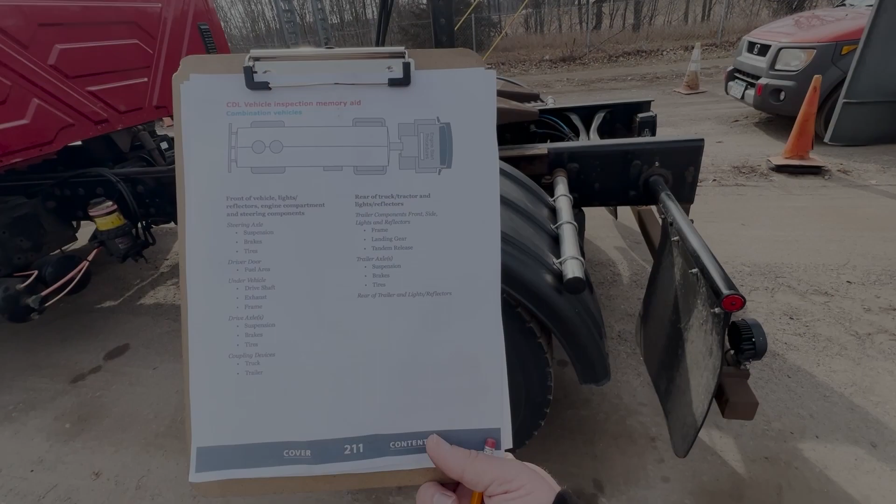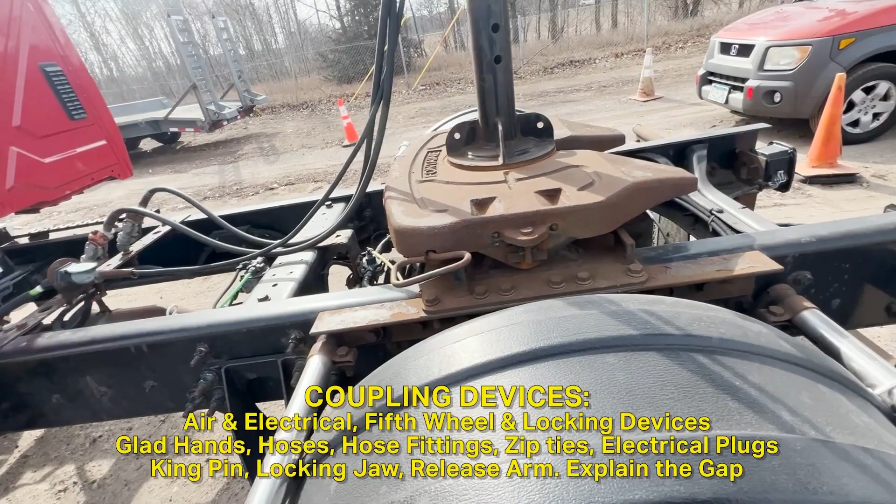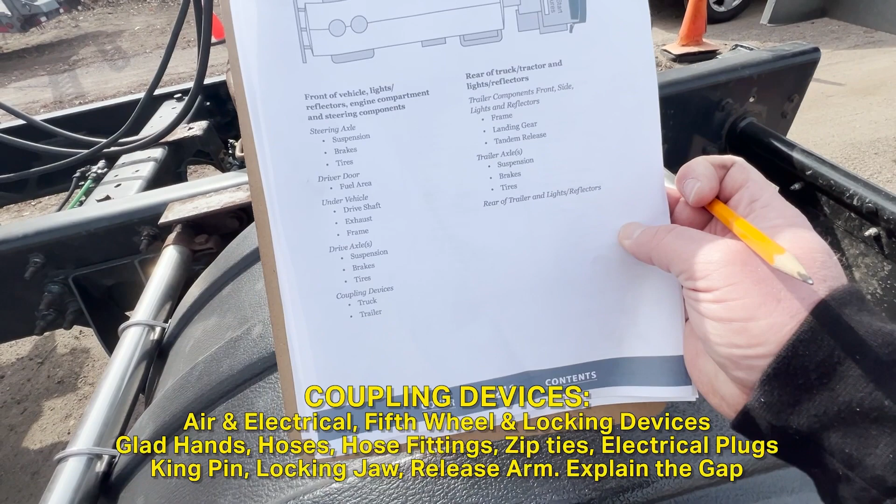So now we're going to talk about the coupling devices for the truck here and also the trailer. There's a lot of things that you have to mention that are not mentioned on this memory guide, but this video and the study guide that we give you with it will help you out with that.

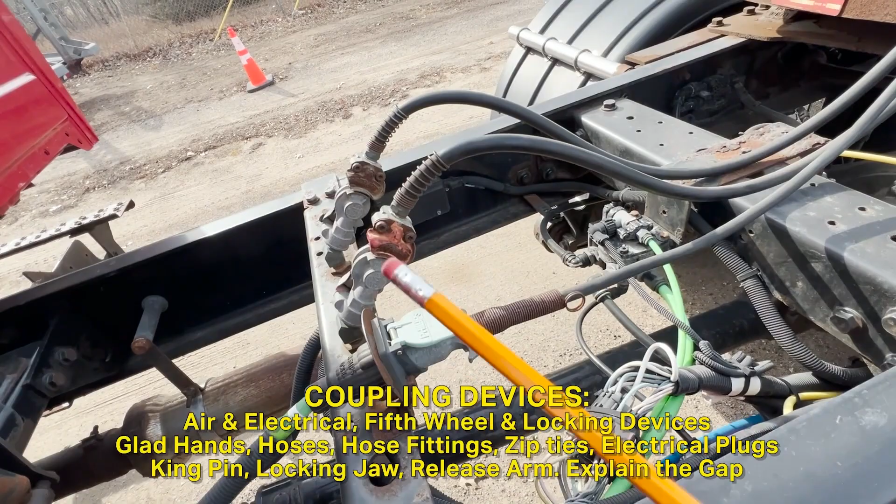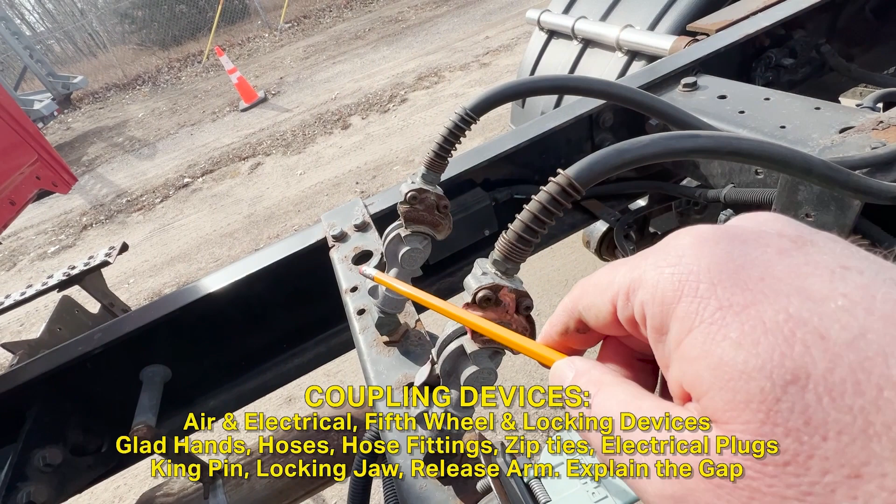So starting with the airlines here and the electrics right here, you're going to mention that at the glad hands, here to here and here to here, I have blue to blue, red to red. They're not crisscrossing one another. Also, they're locked right now. This way, they're not ajar or loose at all. They're locked right here and right here.

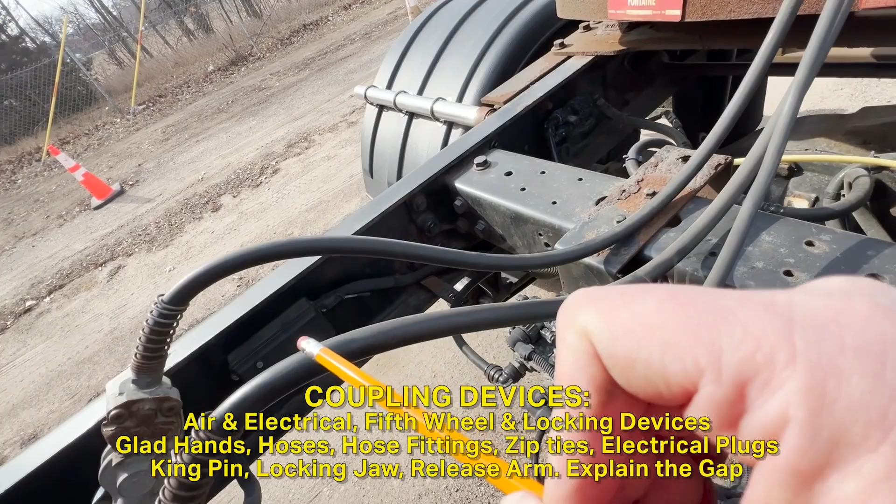And the seal in between here and here, there's no foreign debris or dirt or dust at all. Also, these seals are not cracked or leaking at all. You're going to listen for leaks here and here. And here are its fittings right here and right here. They're tight, not loose, not cracked or leaking at all. And the hoses, there's no abrasions, bulges, or cuts. They're not cracked or leaking at all. You'll listen for air leaks all along here.

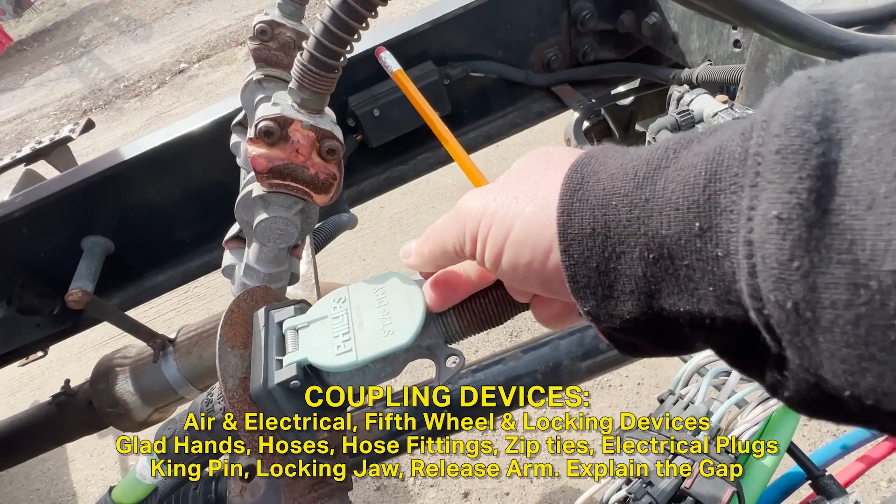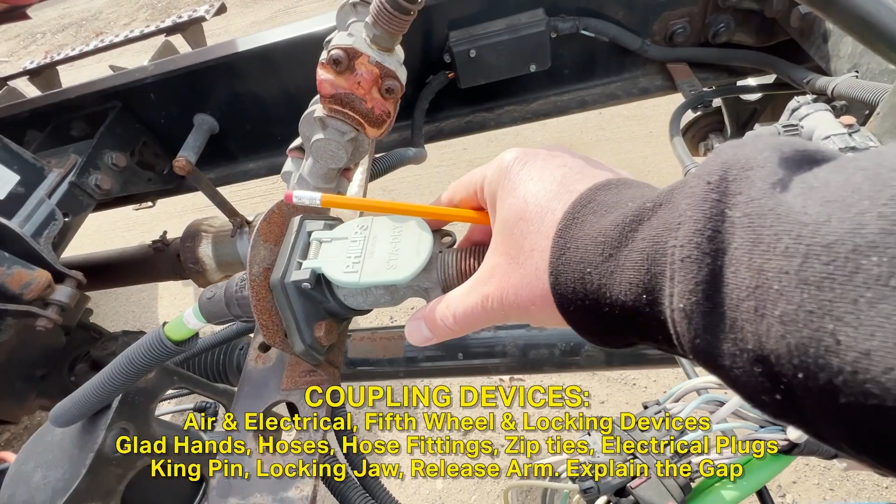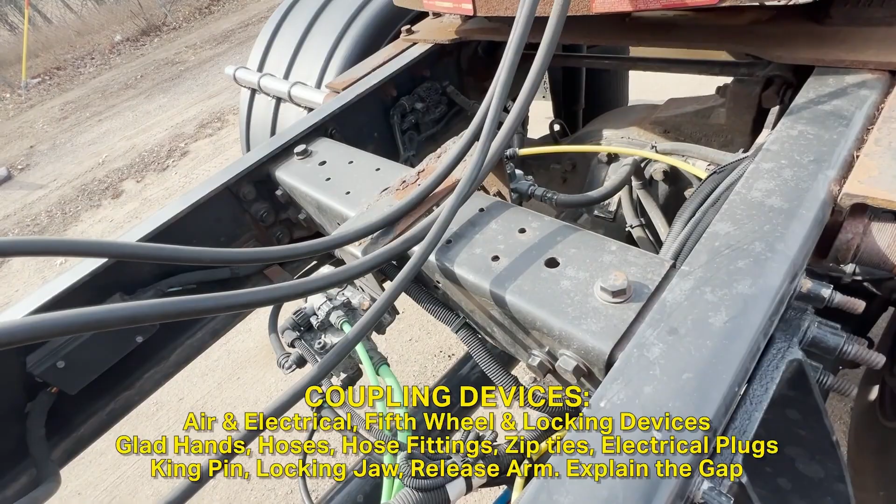And then you'll go to the electrical line right here, and you'll mention that this electrical line is plugged in with this safety latch right here. It has a spring right here. The spring's not loose or missing at all. It snaps in place, it locks right there. This thing's not going to come unplugged. The bracket too, there's no missing nuts or bolts at all. And it's plugged in right here. And the condition of the wires here, there's no cut or exposed or loose wires at all. And you'll mention that the electrical line and the air lines are all securely mounted or attached.

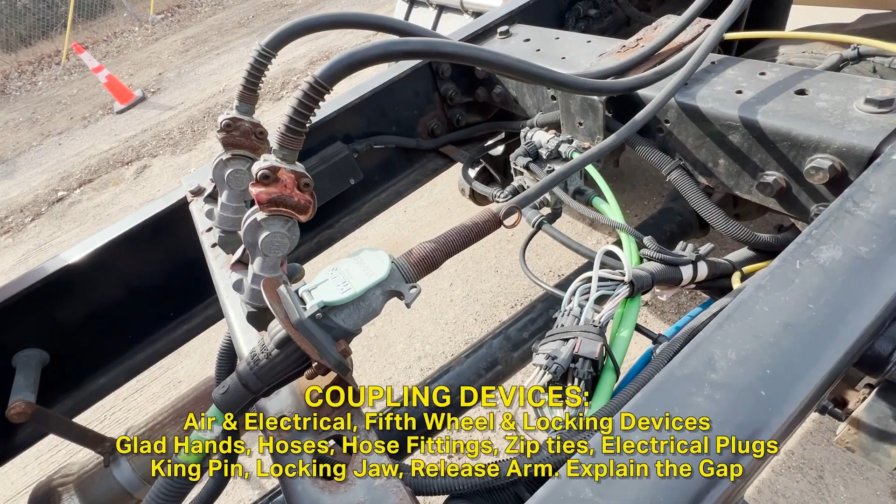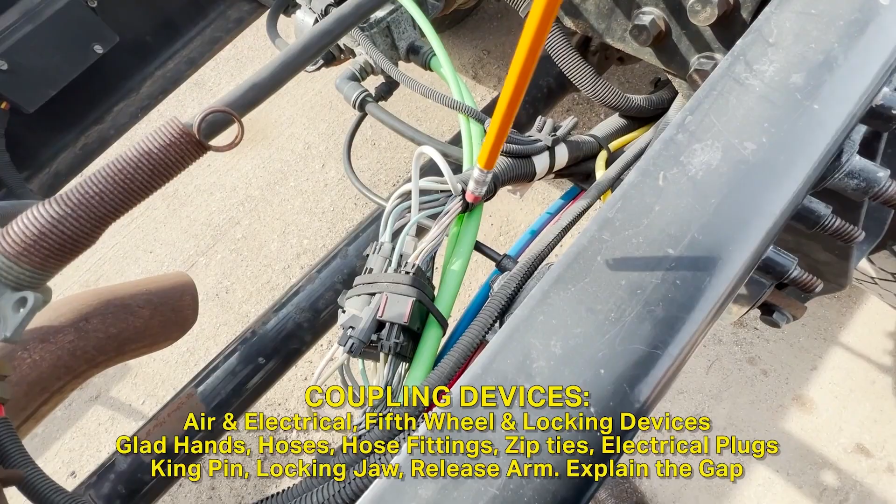Don't forget to mention all of the air lines, hoses, and connectors that are inside the frame of the truck. You don't want to miss those. You're going to inspect all those to make sure first they're all securely tied up. They're not twisted or sagging or hanging down here by the drive shaft at all.

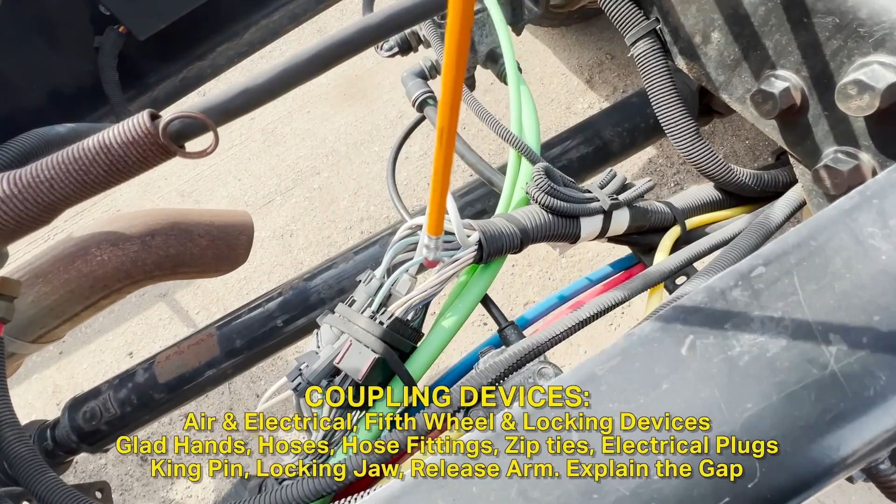And the hoses too, the fittings are secured and tight. They're not cracked or leaking. The hoses have no abrasions, bulges, or cuts, not cracked or leaking at all. And all the hoses and fittings are all secured and tight. And all the electrical lines are all plugged in and securely tied up to the frame of the truck. All right.

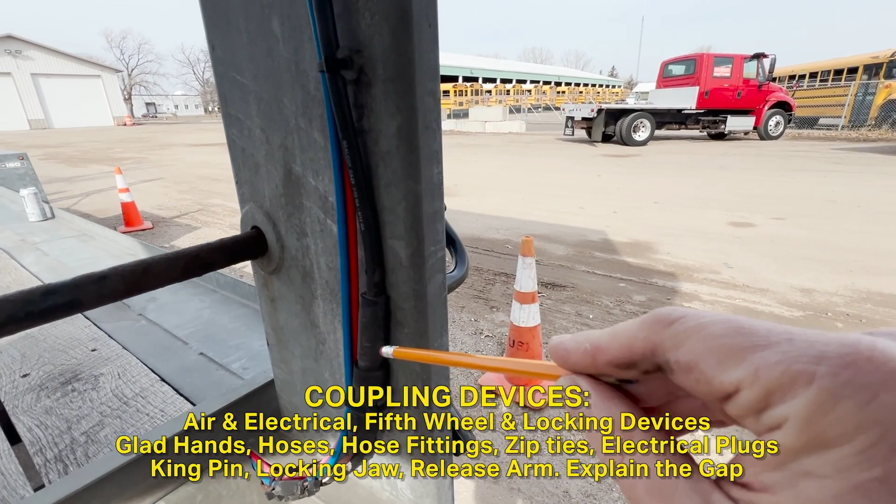Then when you talk about the trailer, for the connectors up here, you want to mention something about these fittings right here. The connection points are the fittings up here, and the filter locations, the fittings, and also how this cord works right here, how it's plugged in right here and also plugged in right here. It's locked in place. It's not unplugged at all.

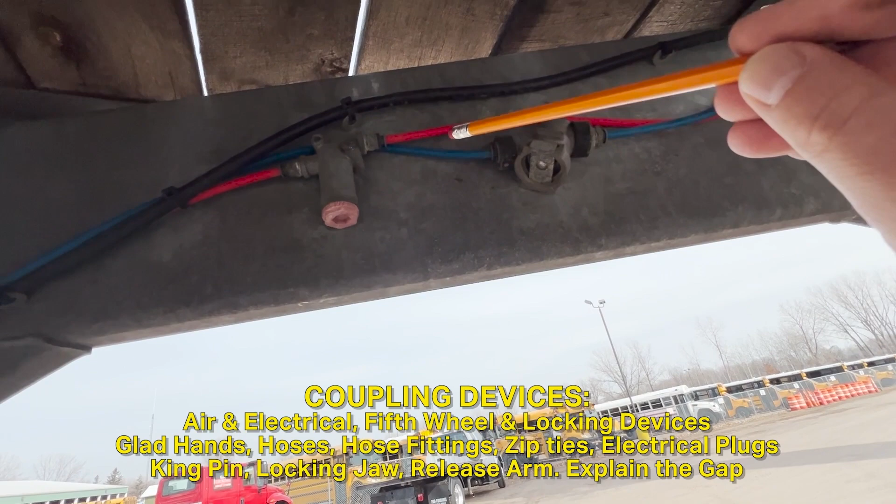So starting with the connectors right here, you'll mention that they're not loose. They're tight, not cracked or leaking at all. The metal here, there's no missing nuts or bolts at all. It's not cracked or leaking. Same here, no missing nuts or bolts. Not cracked or leaking. The fittings are tight, not loose, not leaking at all. And right here, all these fittings are not loose or leaking at all.

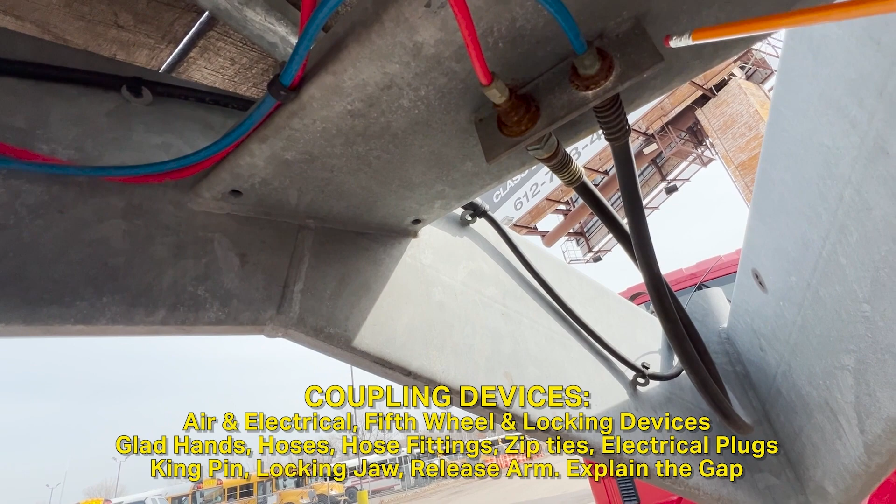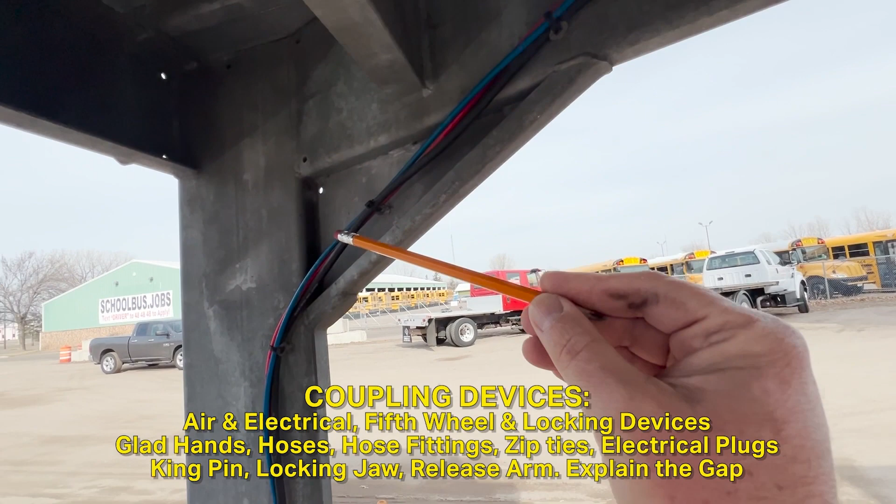The air hoses here, there's no abrasions, bulges, or cuts. They're not cracked or leaking at all. And the electrical line too, there's no cut or exposed wires at all. And all these air hoses and electrical lines are all securely tied up to the inside of the trailer here. You'd inspect it up here, all alongside there and underneath the trailer, just to make sure that they're all securely tied up. They're not going to get caught up on the road at all. And they're all securely mounted.

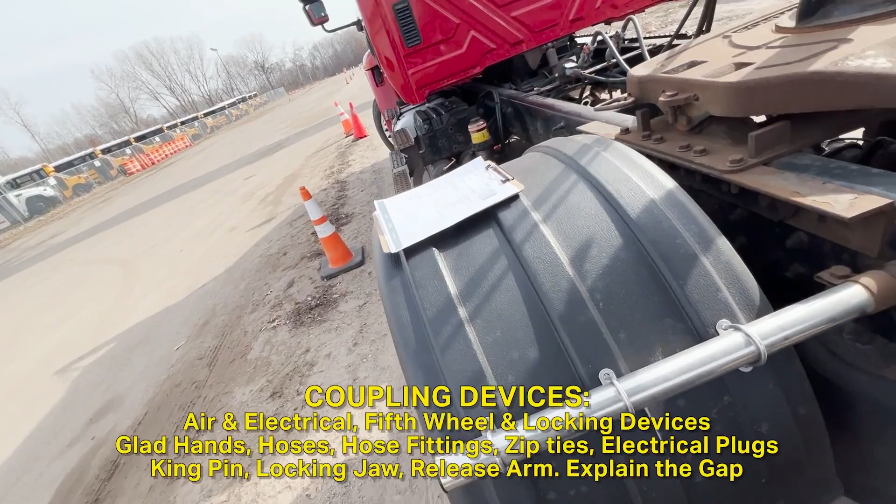Then we come back here, and you'll also mention that there's enough slack for turns, but not so much slack that they're going to get caught up in the truck or hang below the frame of the truck.

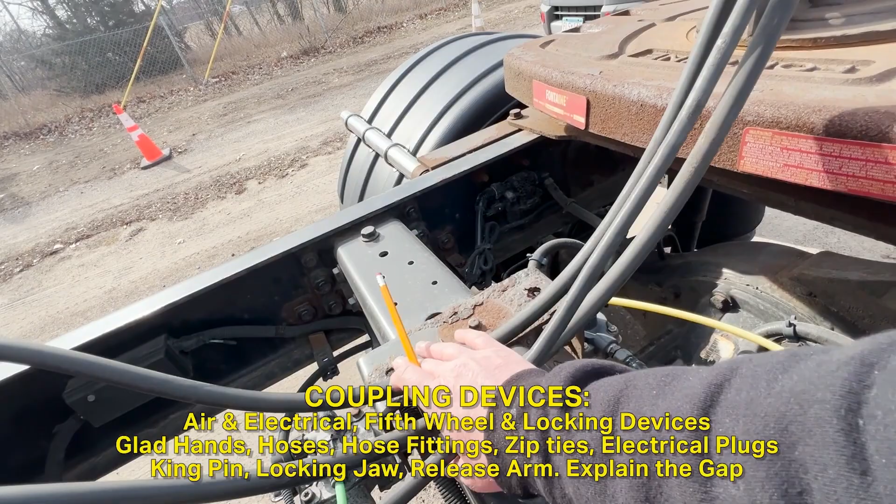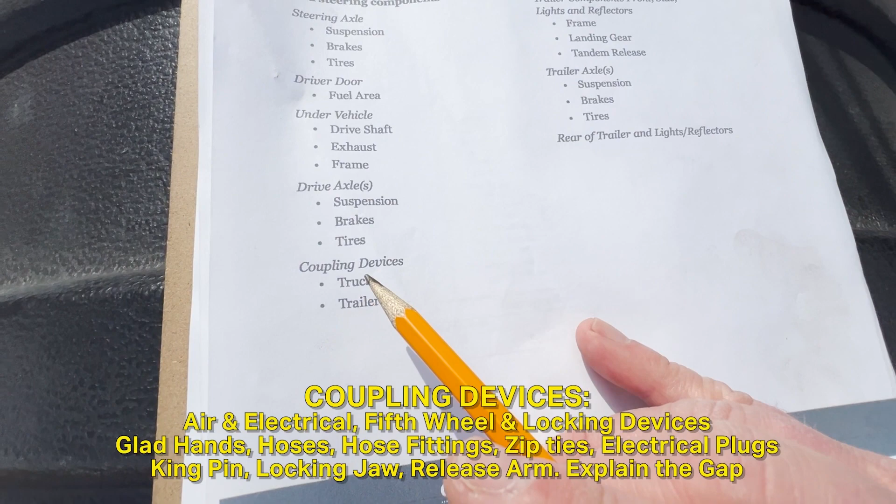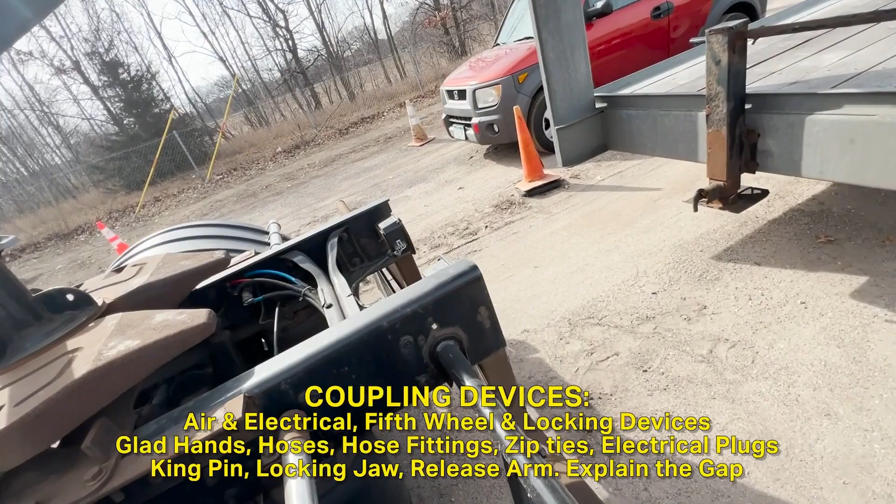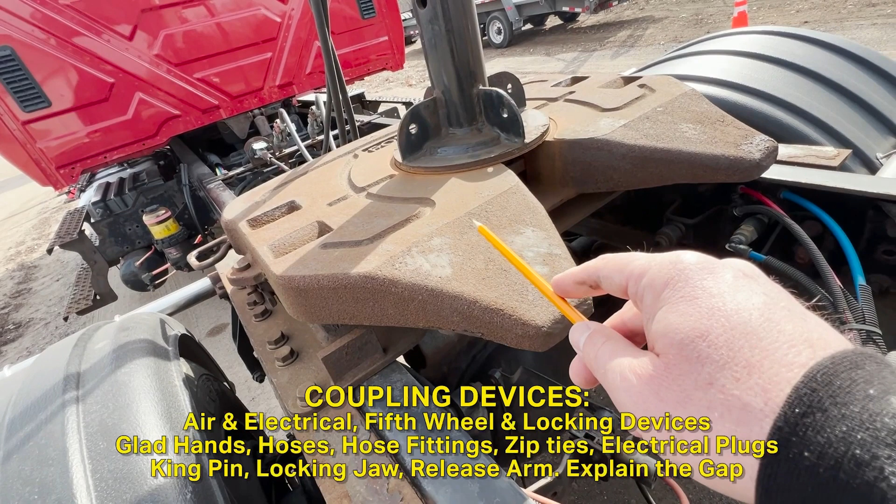So now we're going to talk about the coupling devices, the actual hardware. So we just went through the air and electrics here for both the truck and the trailer. Now we're going to talk about how the trailer is secured to the tractor. So right here we have a fifth wheel. And then we have this platform and these brackets here and all these mounting bolts here. We also have the apron, and then inside here there's a kingpin, and then the locking jaws right here, and the head of the kingpin is down below there.

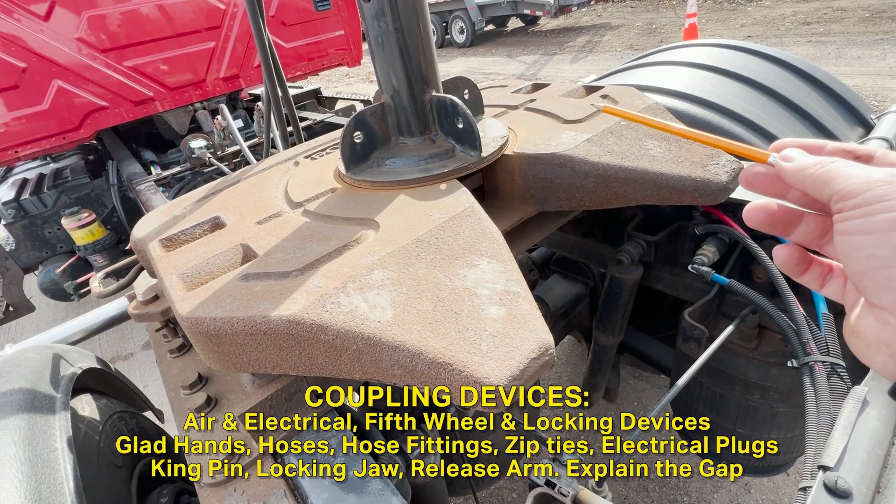So starting with the fifth wheel skid plate, you'll say that it's level, it's not twisted or sagging anywhere at all. And this platform right here is not rusted through anywhere at all. There's no broken or missing welds at all. The metal's not rusted through anywhere at all. And there's no gap between the platform and the frame at all. No sizable gap here at all. It's not twisted or bent anywhere at all.

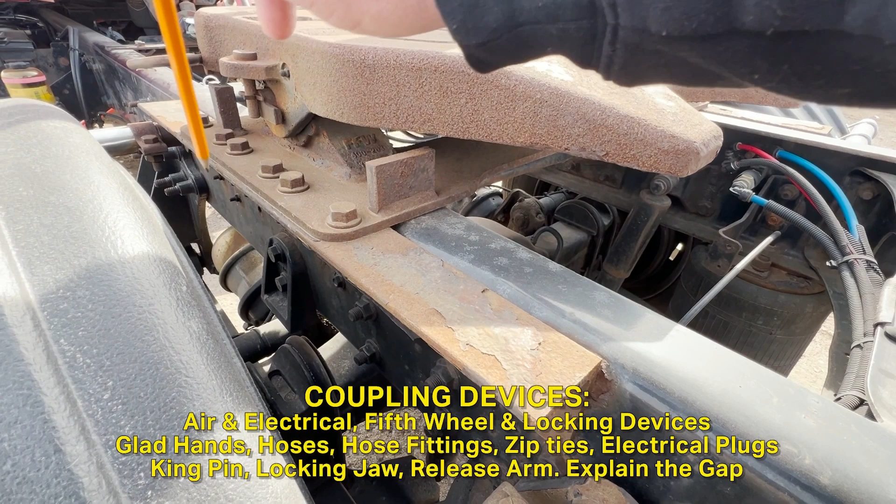These mounting bolts, they're all in place. None of them are loose or missing at all. There's no shiny exposed threads at all. There's no gap between the platform and this bracket. The bracket too is straight. It's not twisted, bent at all, rusted through anywhere at all, and it's tight to the frame of the truck. There's no gap at all.

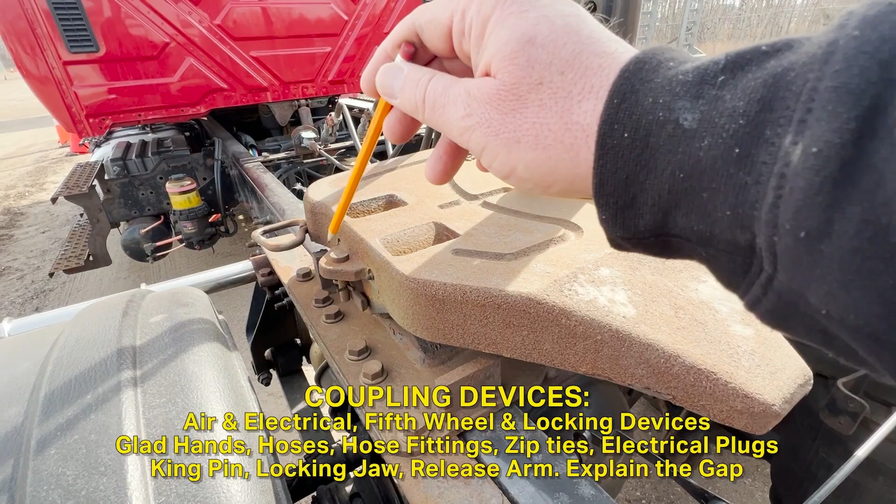And you'll mention that the bracket, all these mounting bolts and platform are all securely mounted, and the skid plate is not cracked, bent, or dented at all. You'll also mention that there's no missing pin or cotter key here. That's for the tilt. It's also properly greased here and here at the Zerks. That's for the inside there. So now we'll talk about what's going on the inside.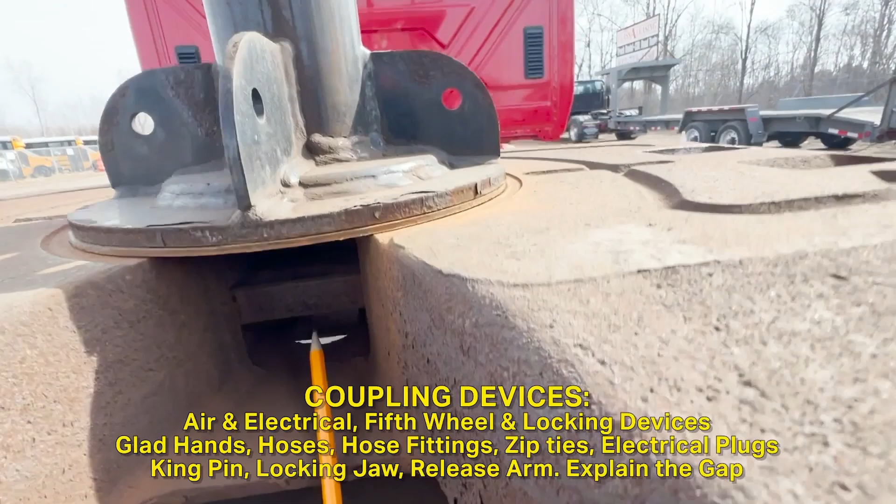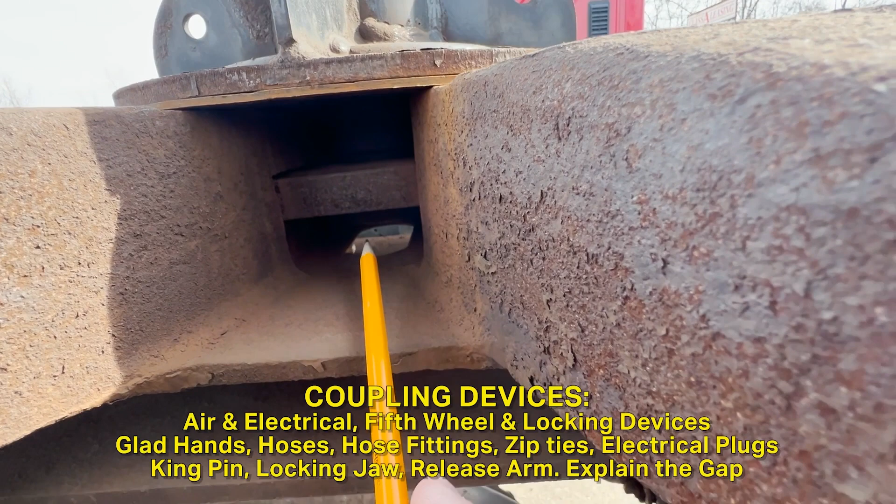So on the inside there, we have a kingpin. The kingpin's inside here, and the head of the kingpin is down there. You'll mention that the kingpin is straight. It's not cracked, bent, or dented at all. And also the head of the kingpin is clearly visible below the locking jaw. It's not sheared off or missing at all.

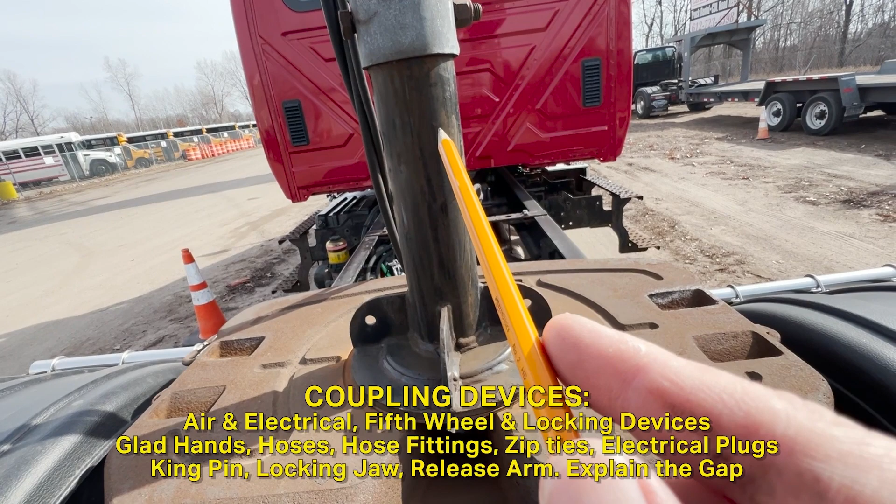And then you'll talk about the apron right here. The apron too is not cracked, bent, or dented at all. There's no broken or missing welds at all. There's no missing nuts or bolts up here at all, or shiny threads at all. The apron is securely mounted.

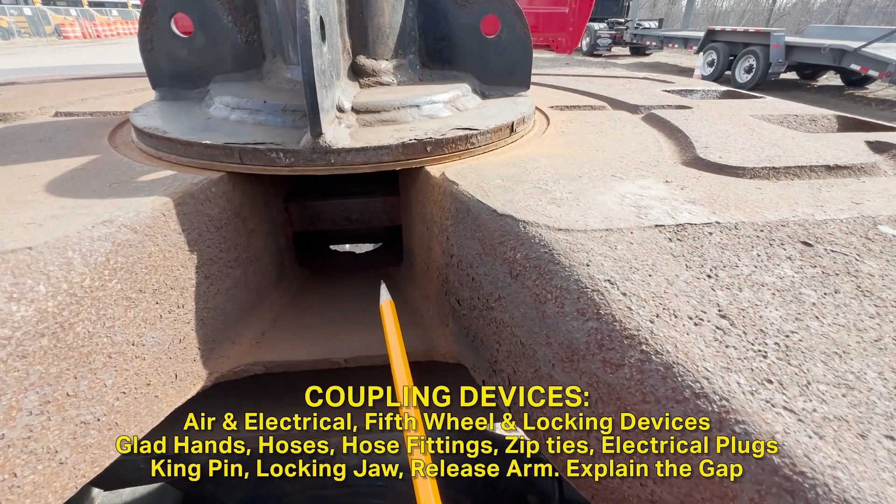And then you'll talk about the locking jaw. So the locking jaw is right here. You'll mention that the locking jaw is around the shank or the neck of the kingpin, exactly where it should be. The locking jaw right now is clearly visible, and it's locked in the drive position. If it were uncoupled or unlocked, this locking jaw would not be visible at all. It'd be tucked inside here. The metal's not cracked, bent, or dented at all.

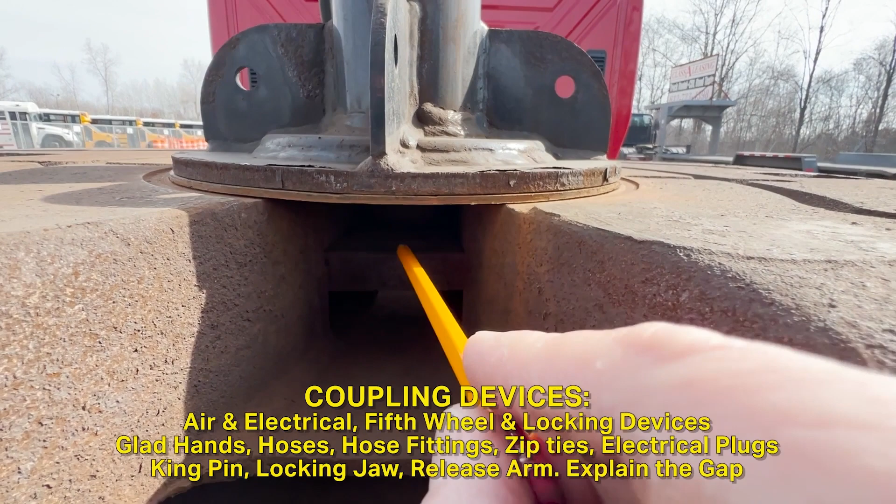It's also properly greased. And then you also inspect on the inside of the locking jaw to make sure it's properly seated around the shank or the neck of the kingpin. And also there's no sizable hole or gap or space between the locking jaw and the neck of the kingpin, to ensure that the trailer doesn't come ajar or come loose.

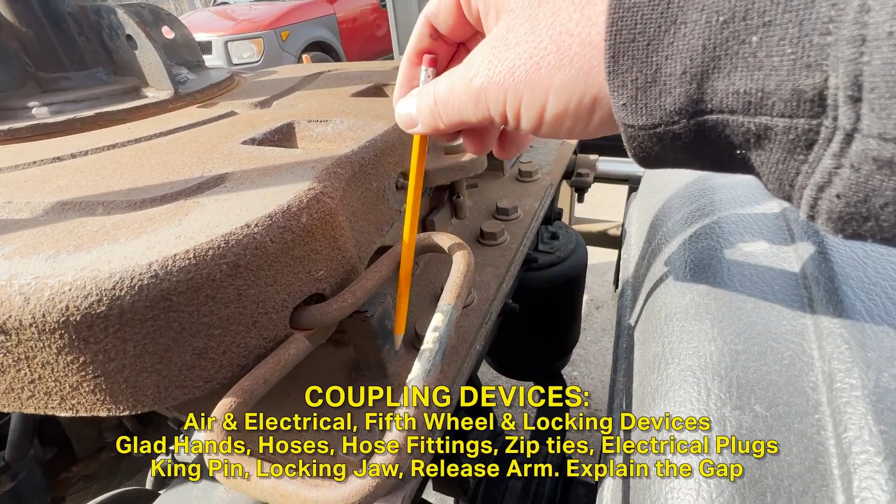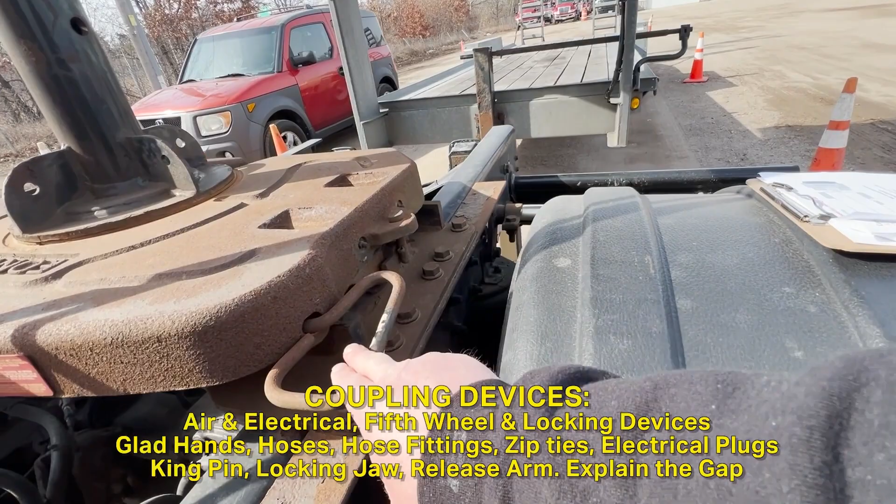And then you'll come over here, and you'll mention the release arm, which is over here. You'll mention that on this setup, on this fifth wheel, we don't have a safety latch here. But we do have spring tension that springs in place. Right now it's locked in the drive position. If it were unlocked, this arm would be way out here. The metal is not cracked, bent, or dented at all. It's securely mounted.

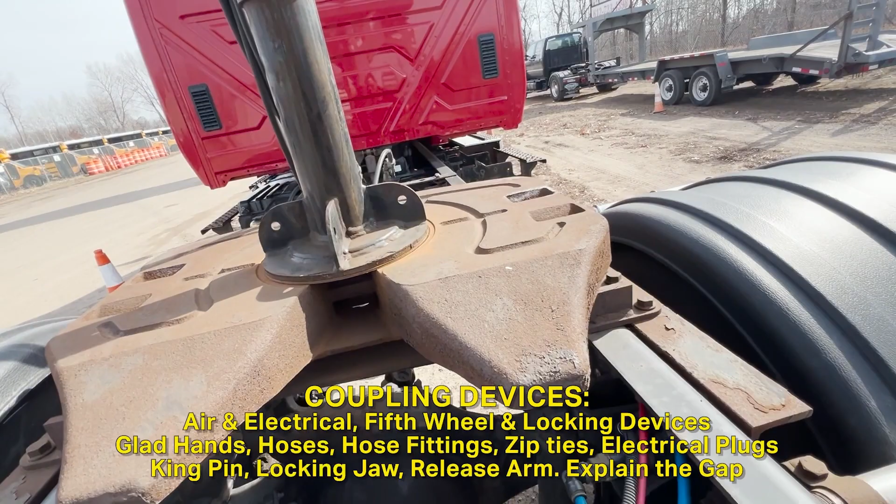And then we're going to inspect this for a couple of things here. First, underneath this apron right here, there's a poly plate. So we don't grease the skid plate. We have this plastic or poly plate right there. You'll mention that that poly plate is clearly visible. It's intact. It's not worn through or missing at all. It allows for the safe turn of my trailer.

And then you're going to talk about a gap. So basically I'm going to come back here to make sure I don't see a gap. Because if you saw a gap between this apron and the skid plate, that may mean that this locking jaw right here could be on the head of the kingpin. In my instance, my locking jaw is around the neck of the kingpin.

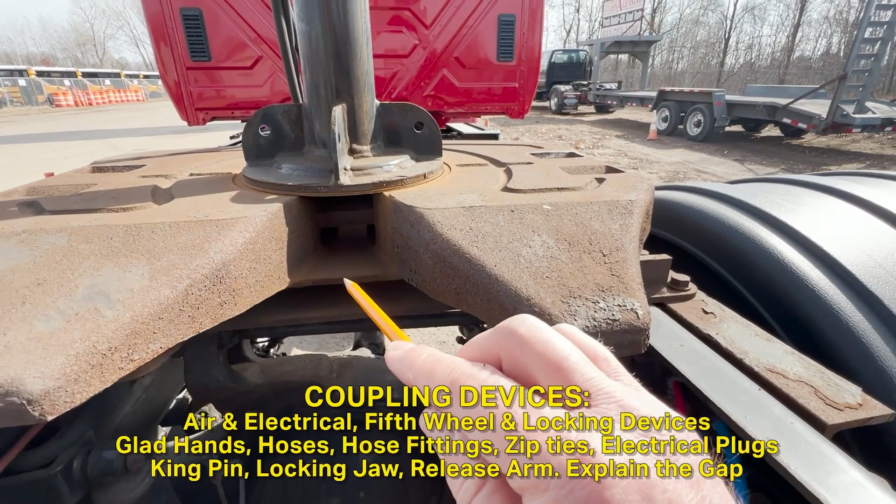I don't have any sizable daylight or gap between the apron and the skid plate, and my trailer is securely connected. So basically what you're doing is saying that I'm going to take a visual inspection to make sure there isn't a gap back here. Because if I saw one, there's definitely a problem, and I want to try to resolve it.

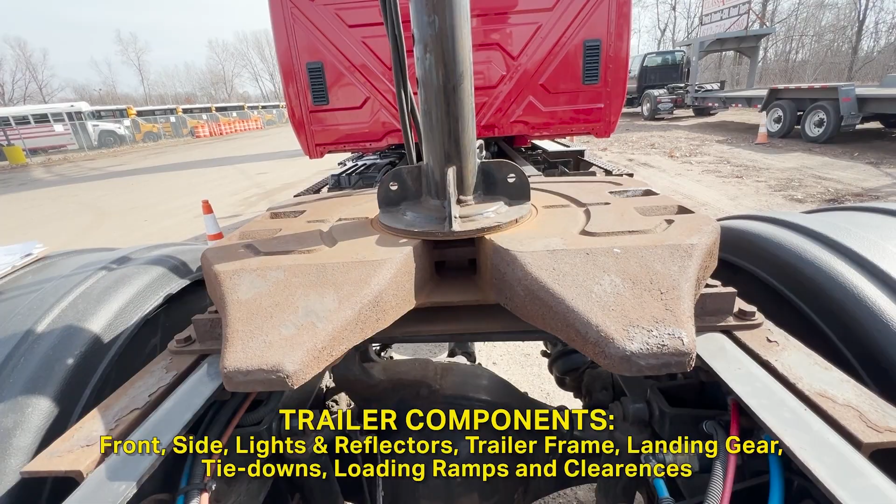So now we're going to talk about the trailer components, the fronts, the sides, the frame, the landing gear, and the tandem release. We can get that tandem release out of the way really quickly, because in our instance right here, those wheels back there, they're locked in place. We do not have a tandem release. So you just mention that there's no tandem release on our trailer. Those are locked in place.

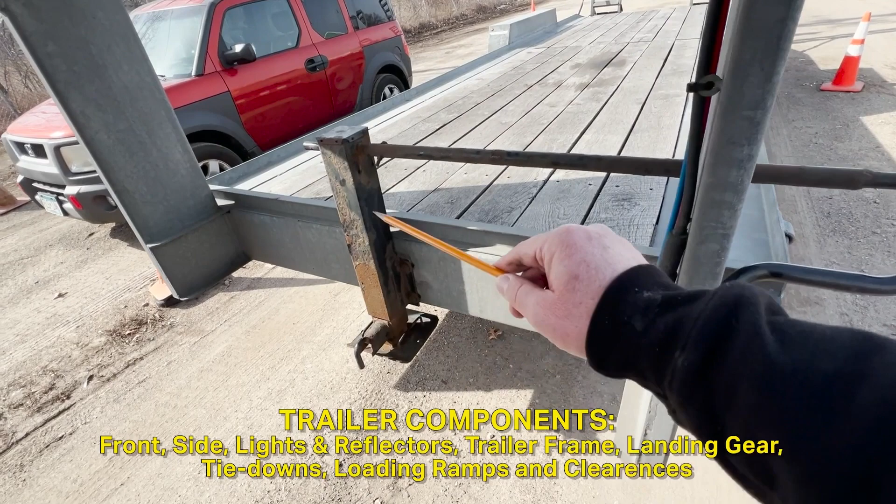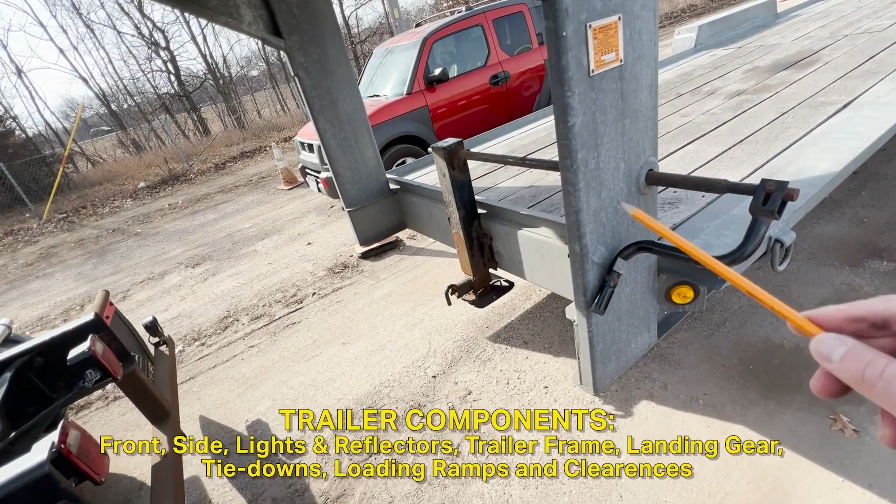So now we're going to talk about the trailer itself. So a couple of things when you talk about landing gear and clearance, you're going to mention that here between the landing gear and the foot and the ground and the back of the truck and the fifth wheel, we got plenty of space for the road and for turns. And then also right here at the landing gear, you'll mention that this foot is locked in place with this pin right here. This pin is not loose.

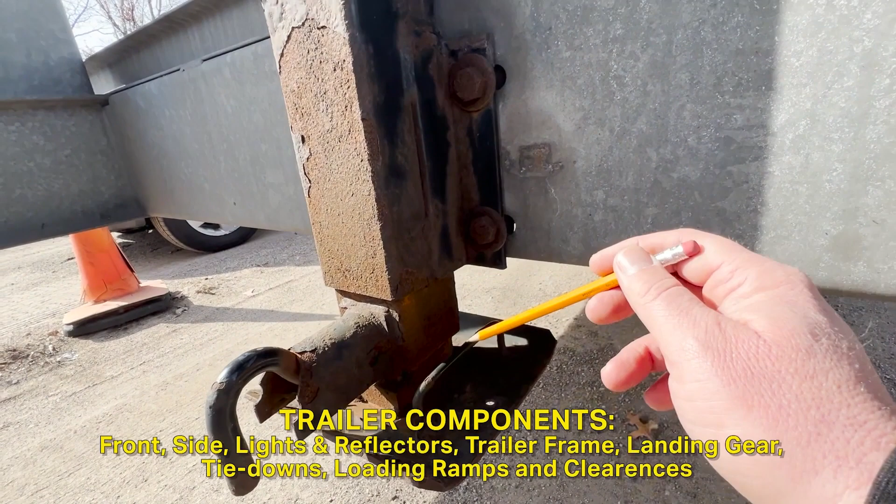It's not cracked, bent, or dented right now. It's not going to accidentally come loose because it's locked with a spring. That spring is tight. It's not missing. And there's also enough room for the road right here and right here. And the last thing you might mention too is that there's no ice or debris if there were winter, or mud, rocks, or whatever caught up in this thing, because you want to be able to safely land this trailer if you had to land the trailer.

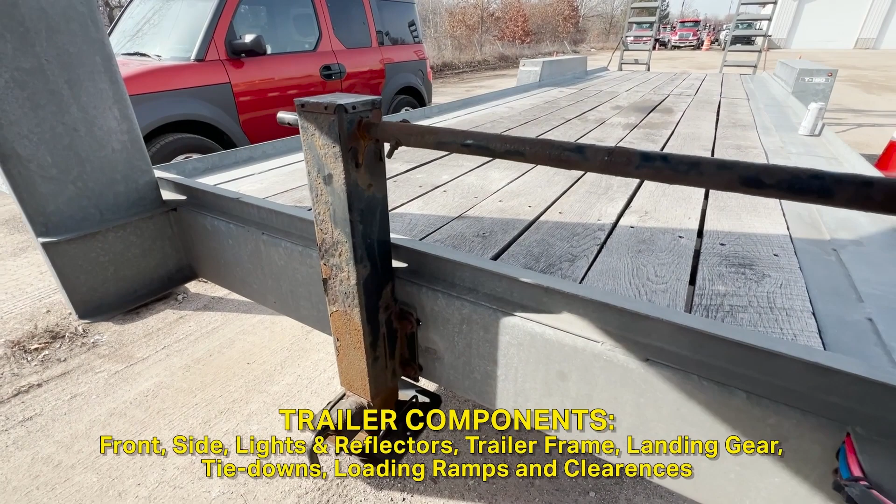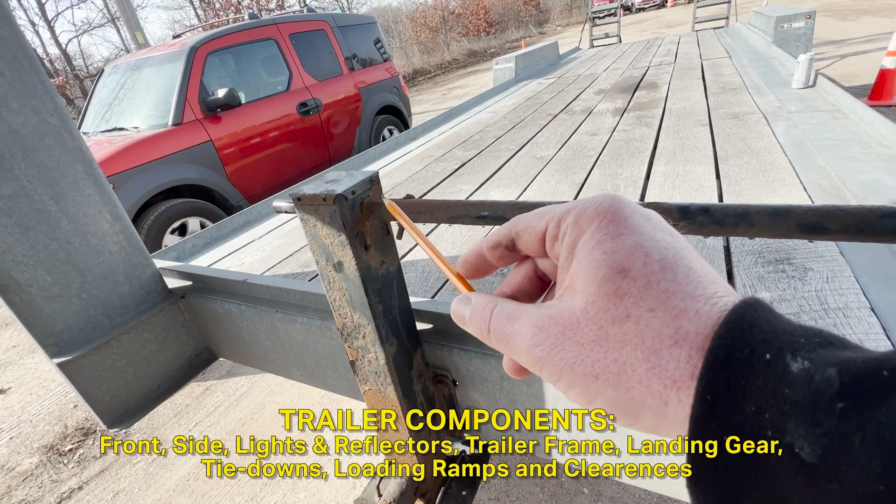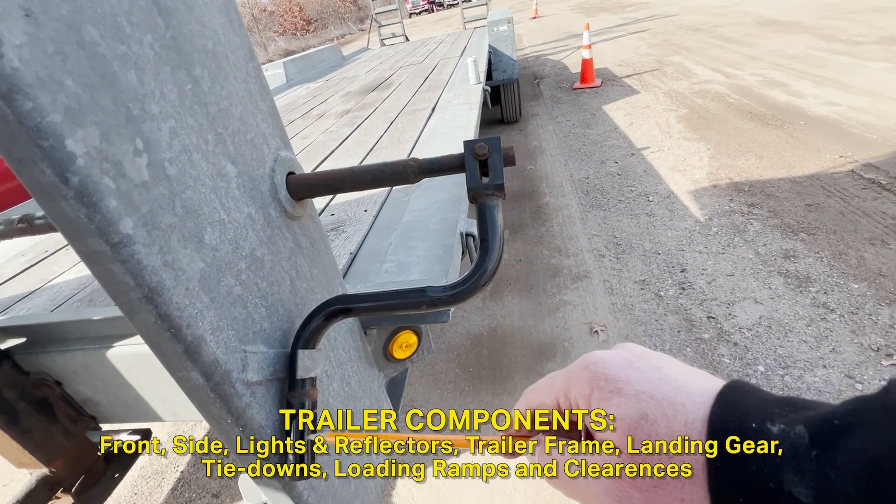And then you'll talk about no missing nuts or bolts at all here, and up there. The metal is not cracked, bent, or dented at all. It's also properly greased right here. It's secured to the frame of the trailer. It's not twisted or sagging anywhere at all. Also, this handle is stowed away and locked tight. It's not going to come loose in the drive position.

So now we'll talk about the frame itself. So when I look at the frame of the trailer here, I want to make sure first I have plenty of room and clearance for the road. My frame is nice and level with the road. It's not sagging one way or the other, which might indicate that I could have a suspension problem or a cracked or missing cross member or beam.

It's nice. And then you'll mention the metal. The metal's not twisted or bent at all or cracked anywhere at all. There's no broken or missing welds on the trailer at all. The trailer can be welded, so you wouldn't mention illegal welds because it can have welds on it. And then you'll talk about these tie downs here. You'll mention that the tie downs, none of them are loose or missing at all. There's no broken or missing welds at all.

The frame members here and up here on top are all straight. They're not twisted or bent at all. All the flooring or decking is in place. None of it's loose or missing. There's no missing screws at all. None of these boards are cracked at all. Everything on top here is secured.

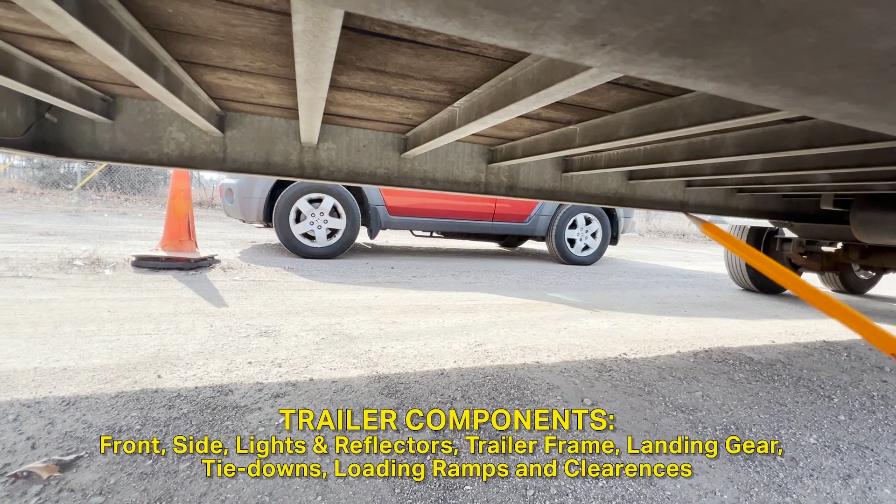And then you'll go down below and you'll talk about all the cross members underneath the trailer. So you want to mention that there's no loose or missing cross members at all. They're all secured to the trailer. There's no broken or missing welds at all. The metal's not cracked, bent, or dented at all. And you'll mention everything below here, alongside here, is all securely mounted and ready for my cargo, and also strong enough for my cargo.

When we get to the back of the trailer, you could mention the ramps, or you could do that right now. You could say that right now these ramps, they're locked up in the upright position with these brackets right here. There's no missing pins or cotter keys at all. Here, the mounting bracket right here, there's no broken or missing welds at all, no missing nuts or bolts. That shaft is straight. It's not bent or cracked at all.

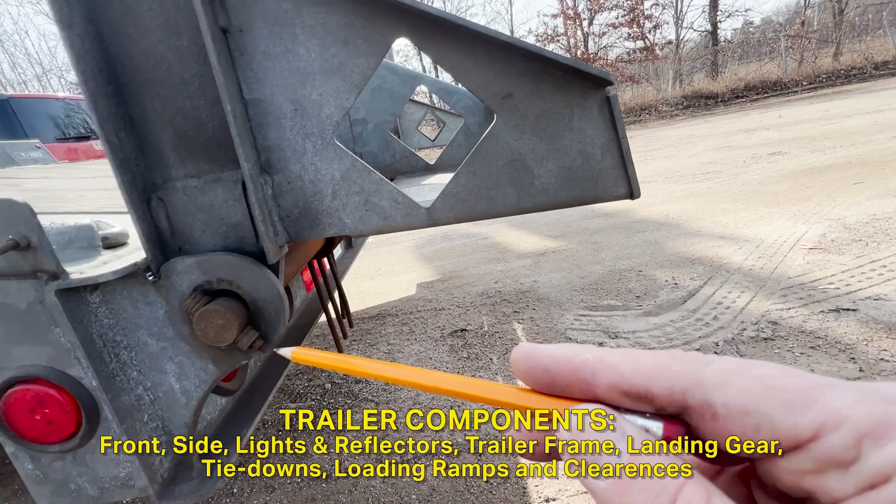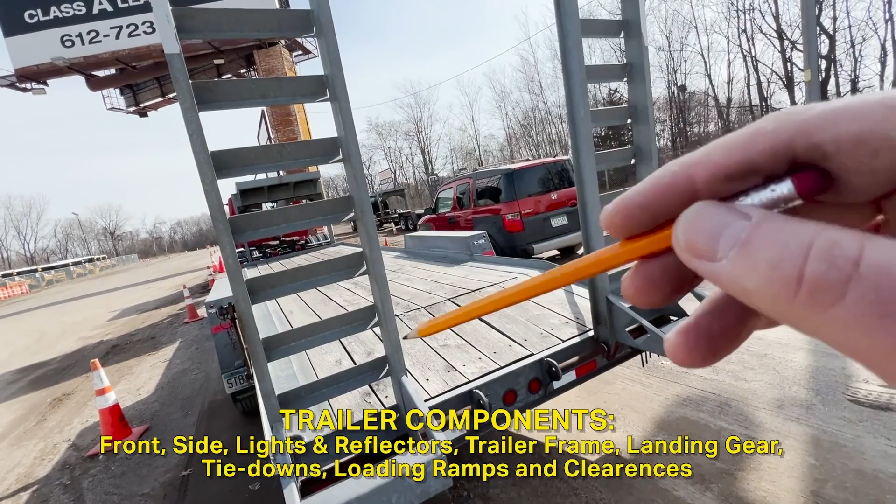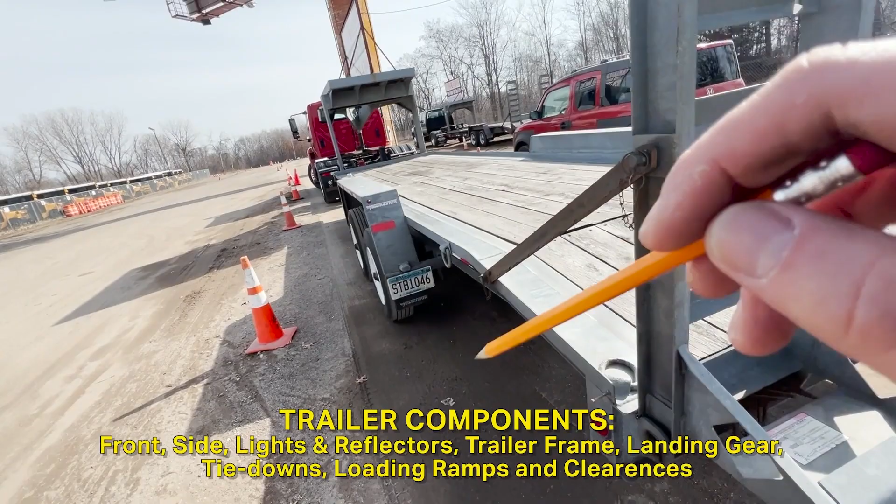There's no loose or missing springs at all. Right now, they're straight and locked up tight. They're not twisted or sagging anywhere at all. There's no broken or missing rungs here at all, or steps at all. And then you'd mention that the ramps, along with the frame of the trailer here, everything's secured and tight and ready for my cargo.

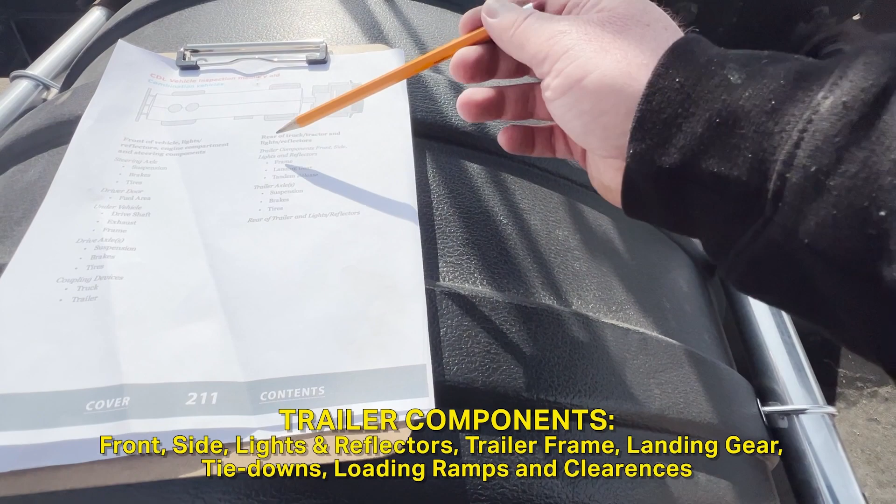Right, so now we're going to talk about the lights and reflectors on the trailer. So the first thing you're going to want to point out is that you have DOT approved tape up here, and also DOT approved tape here on the side of my trailer. So you'll mention that all this DOT approved tape is secured to the trailer. None of it's obstructed at all. All of it's clean and clear and securely mounted.

And then you'll talk about the light and reflector here. Here. Up there. Here, the license plate light. The ABS light and the light and reflector back here.

The first thing I'll mention is you'll say that all of the lights and reflectors, they're all secured to the truck. The rubber pieces here, they're all intact. They're not loose or missing at all. Also, there's no loose or hanging wires or exposed wires at all. All the plastic here is clean, clear, not cracked at all. There at the license plate light, there's no loose or missing license plate light at all.

Same up here. Everything's clean, clear, not cracked. No loose or hanging wires at all. Up there too as well. And also over here. Clean, clear, not cracked. This rubber piece is intact. There's no loose or hanging wires at all. All the lights and reflectors are securely mounted and have the proper color up front, which is amber, and the proper color in the back, which is red.

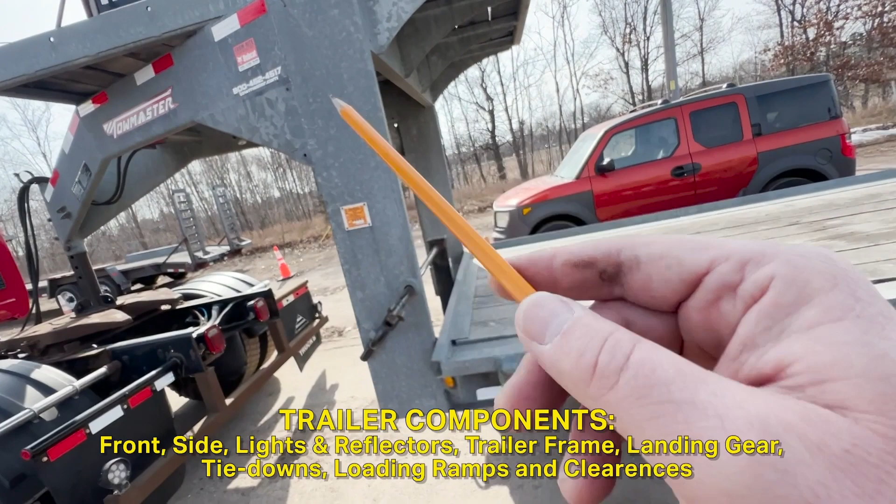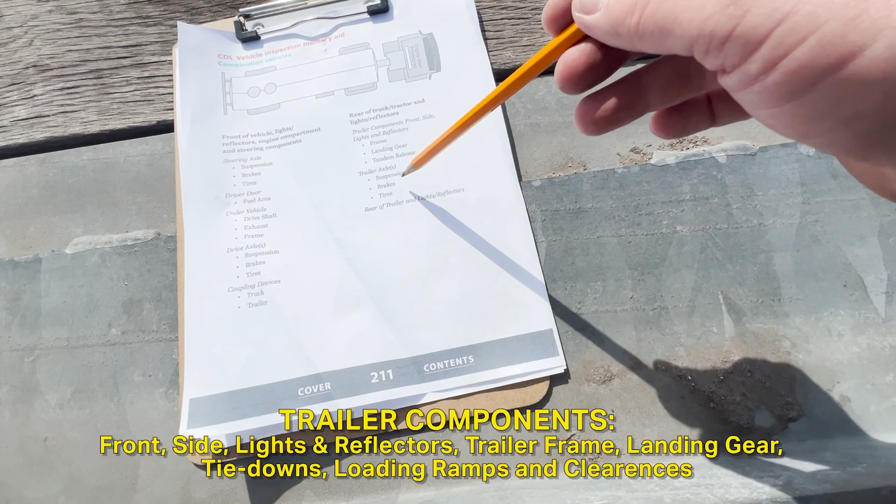Now we're going to talk about the trailer axles, the suspension and brakes and tires. So back here, if you hadn't mentioned already that we don't have a tandem release, that was further up in the document. But if you missed it for some reason, this would be a good time to mention it. There isn't a tandem release. These are locked in place.

Also, starting from the outside and in, we're going to talk about the tires here and here. And you'll point to the insides of these tires and the outsides, and also the tread right here. So starting with the insides here and here, and outside here and here on the tires. They'll mention that there's no abrasions, bulges, or cuts. They're not cracked or leaking at all. Also, there's no exposed belts or threads.

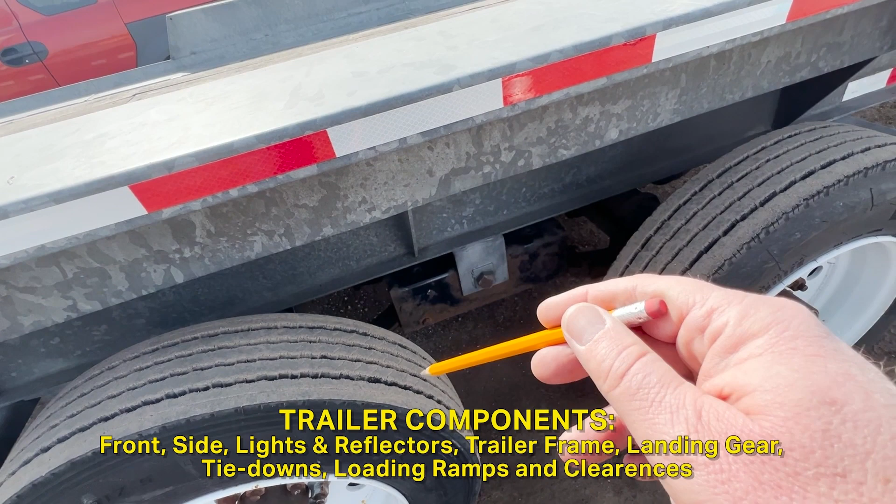And then you'll talk about the tread depth here and here. It's not worn too thin. It's at least 2/32 deep here and also here. And then you'll mention the fact that these can be recap tires. These are not. However, if they were, the tread's not coming loose anywhere at all. And also, you inspect to make sure that the tires are properly seated with the rim. There's no exposed beads at all. Also on the inside of the tire, too, as well. No exposed beads at all on the inside of the tire.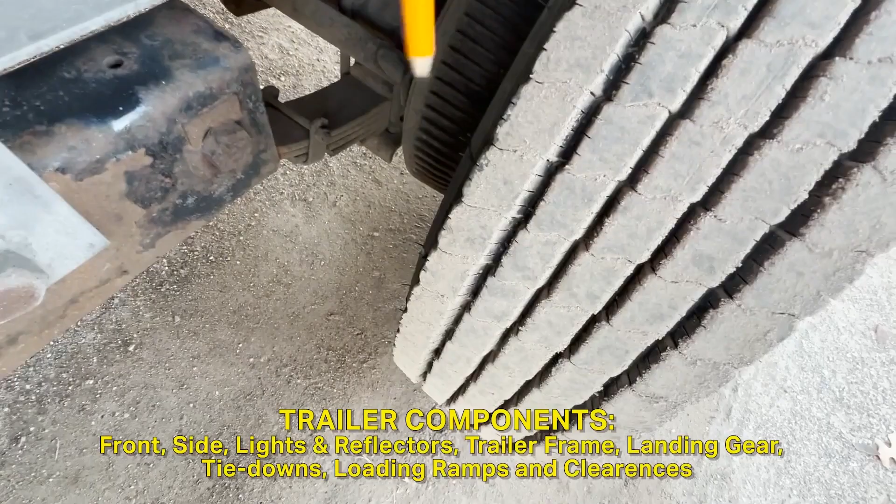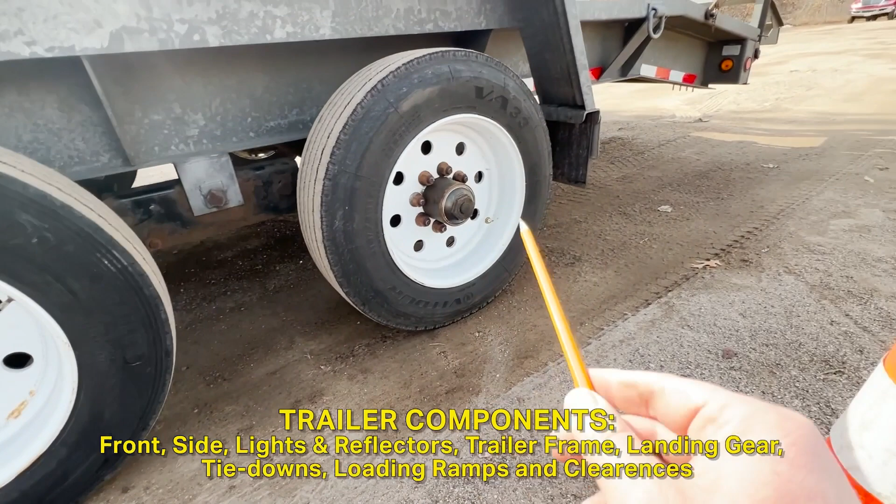So, and then you'll say that they're the same type and size. I don't have mismatched sizes or types of tires at all. I don't want that. And also, they have to be properly inflated. So I'm going to read the spec on the tire. And then with an air gauge, I'm going to inspect it at the valve stems here and also there. The valve stems are clearly visible. They're not obstructed or hidden. They're not cracked or leaking at all. The fittings are tight. Dust caps are in place.

And make sure that you say that you're going to check these for proper inflation with a tire gauge. They want to hear that. They don't want to hear that you're going to use a rubber mallet or your foot or anything. Because you're checking for proper inflation, and you can only do that with a tire gauge.

So, the tires here and here are securely mounted. The rims, you're going to inspect the rims both outside here, and on the inside of the rims to make sure first they're properly seated to the tires, and then also that there's no illegal welds. You'll inspect that, make sure there's no illegal welds, and the metal's not cracked, bent, or dented at all.

In this instance right here, these are steel rims, so they're not rusted through anywhere at all. There's no rust holes at all. And where the lugs and the lug nuts meet the rims as well, there's no out of round holes, which might indicate that at one time these rims were loose or running loose at some point, and they are not.

And then you'll talk about the lugs and the lug nuts here, and also here. You'll mention that first, all of the lugs and lug nuts, none of them are loose or missing at all. None of them are broken or cracked at all. There's no shiny threads or metal shavings inside the rim here or here at all.

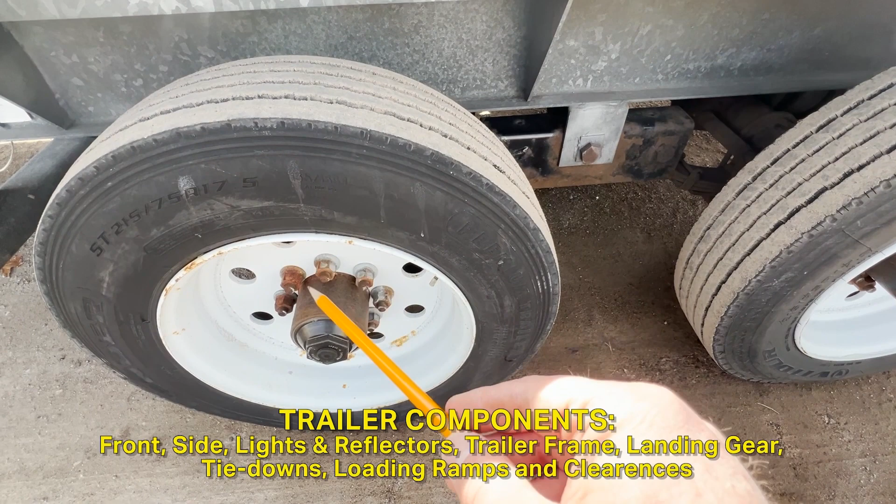And all these lug nuts are tight to the rim. None of them are loose at all. There's no space or gap between the lug nut and the rim. And you can also mention that you might look for some rust trails potentially. But I think out of round holes or gaps would be a greater indicator than rust trails. So you just want to make sure that those are all tight to the rim and securely mounted.

All right, so now we'll talk about the hub oil and seal here and here. You'll mention that I do have a hub seal here and here. The seal is not worn through, cracked, or leaking at all. If it had been leaking, I would see an indication on the inside of the rim right here and here. That would clue me in. I don't want to see that. And also I would inspect to make sure that I have enough oil in the hub here and here. And if I were low, I would add it where these caps are here and also there.

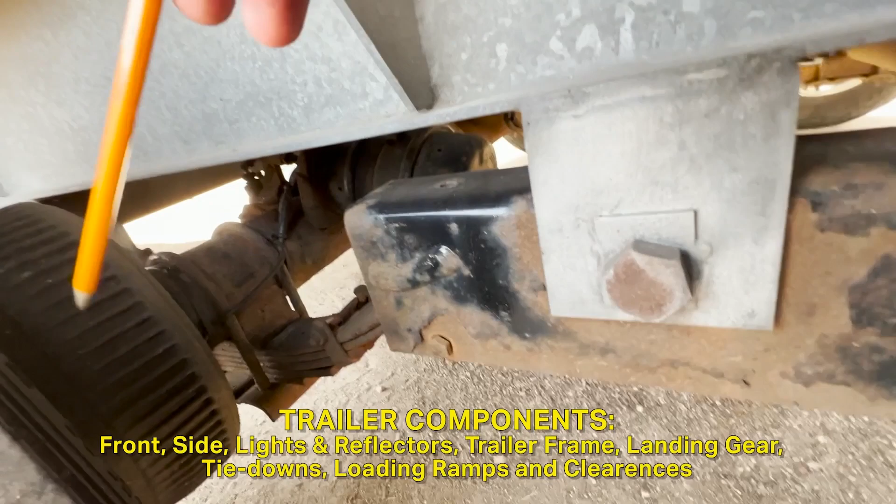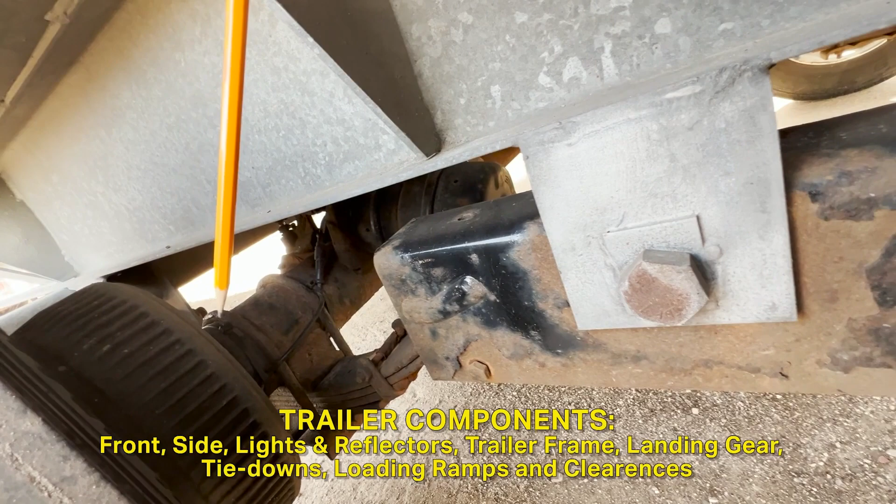All right. So then working from the outside in, now we'll talk about brakes here. So starting with the brake drums right here and also right there. You're going to mention that you're going to inspect the metal to make sure that there's no illegal welds. You're going to look inside these drums right here and there to make sure that they're dry. There's no oil or grease on the inside of the drums at all. Also, there's no signs of warping or discoloration inside these drums at all.

And then you'll inspect the brake lining here and here to make sure that they're not worn too thin at all. There's at least 1/4 inch of brake lining here and also back here. And they're evenly worn all the way around here and here and side to side. And none of that brake lining is loose or missing at all. They too are dry, no oil or grease there or there.

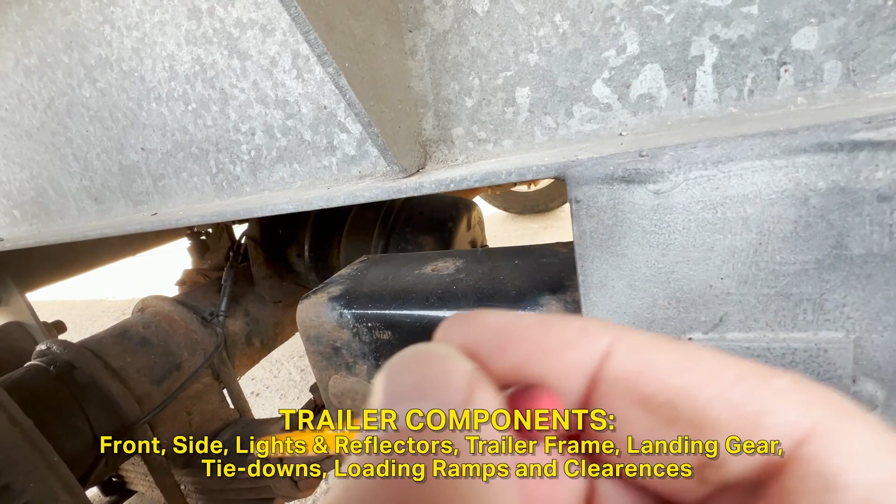And then following the brakes here, you'll follow the ABS line that goes back to the brake chamber right here. And on that side of the axle, there's a slack adjuster and the push rod comes in this way. So the ABS line, you'll mention that the ABS line right here, it's securely attached. It's also plugged in. There's no exposed wires. The ABS line is securely mounted.

The brake chamber right here, you'll mention that the brake chamber is securely attached to the bracket right here. The brake chamber itself is not cracked, dented, or leaking at all. When there's air in this brake chamber, you'll listen for air leaks. The C-clamp is not loose or missing at all. There's no missing nuts or bolts at all.

The bracket too is intact. It's not rusted through. There's no broken or missing welds, no missing nuts or bolts. And there's no sizable gap between the brake chamber and this bracket. The brake chamber is also not sagging or hanging loose at all. No missing nuts or bolts or shiny exposed threads.

The slack adjuster is right here in front of the axle. The slack adjuster is properly greased at its bushings. And then also there's no missing pins or cotter keys at the push rod. The push rod is straight. It's not bent or cracked at all. It's not going to get bound up in the brake chamber at all.

And to check play right here, I'm going to have to block or chock these tires and then release the trailer brake. And then I'm going to pull those push rods by hand and make sure there's no more than 1 inch of play and it's even on all sides.

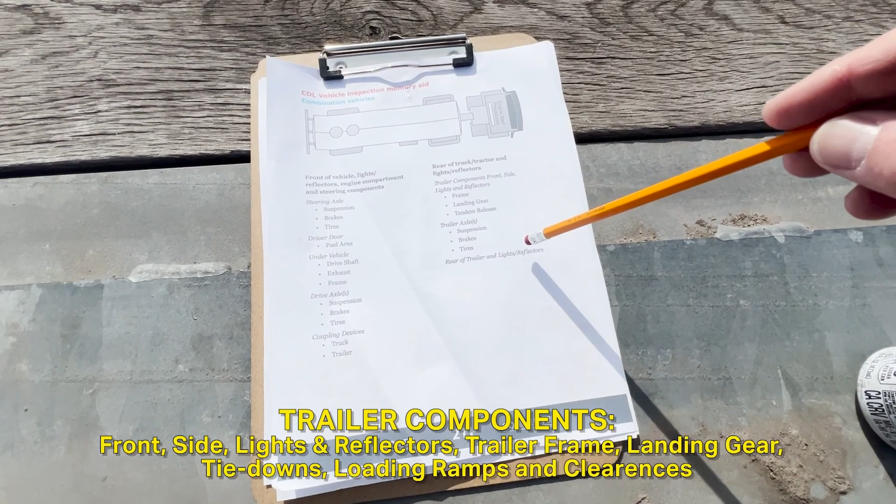So now we're going to talk about the rear of the trailer and lights and reflectors. So coming here to the rear of the trailer, we're going to talk about the lights and reflectors, this DOT approved tape here on the wheel wells and up on the ramps, and then also potentially the ramps themselves if you missed them. So if you were talking about the frame of the trailer and you missed those, then you would address those now. But in this case, we got those when we talked about the frame of the trailer. So we'll just talk about lights and reflectors.

And also potentially the rear of this trailer as well. We'll mention that it's nice and level with the ground right here. It's not sagging anywhere at all. Here at the rear of the trailer, there's no loose or missing deck boards up there, no missing screws at all. And then you'll mention that you have DOT approved tape right here. This DOT approved tape is clean and clear. It's not obstructed at all. It's all adhered properly to the trailer.

And it covers 100% of the visual space back here. So they don't mean literally 100% everywhere. They just mean the visual space. If you were driving behind this vehicle, you would see that the reflective tape covers 100% of the visual space.

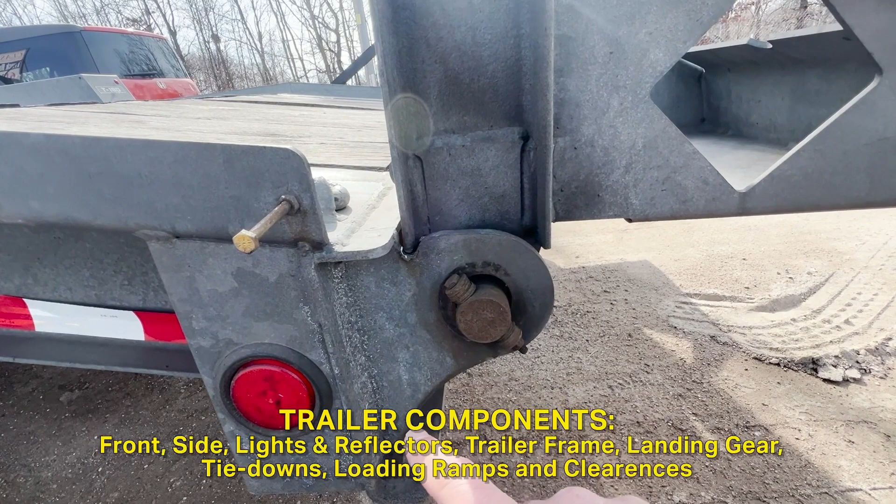All right, so I'm going to talk about the ramps. So the ramps here, they're secured and locked up in the drive position with these brackets right here. The brackets are not cracked, bent, or dented. No missing pins or cotter keys at all. Down below here at this load bearing bracket, there's no broken or missing welds at all. It's also not twisted or bent at all or cracked. There's no missing nuts or bolts here or shiny exposed threads.

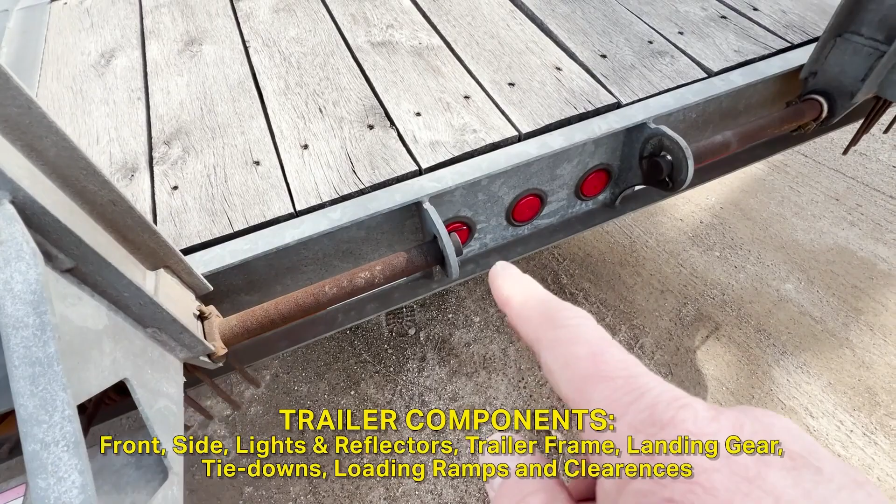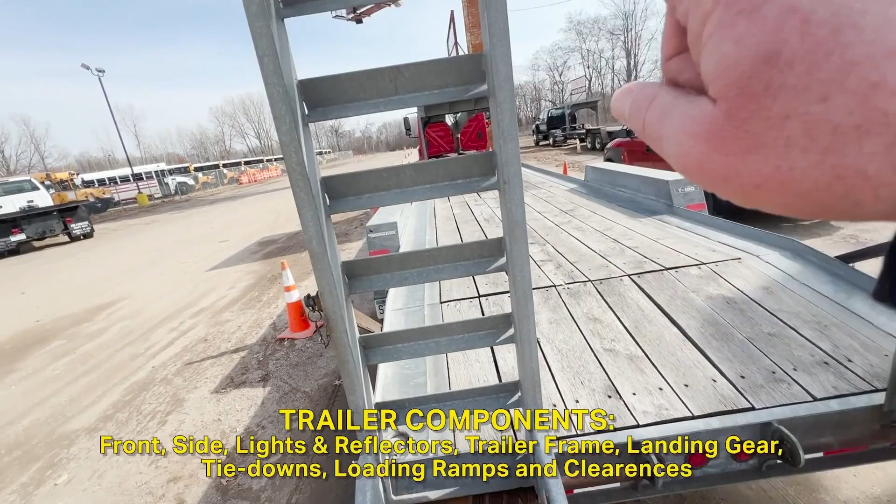The shaft itself is straight. It's not bent or twisted or sagging anywhere at all. There's no missing pins or cotter keys at all. No loose or missing springs. None of those springs are broken or cracked at all. These are locked up and straight. They're not twisted or sagging or hanging down low and loose at all. They're locked up tight in the drive position. And also there's no loose or missing steps at all or broken or missing welds at all. And the ramps here are securely mounted and also strong enough for my cargo.